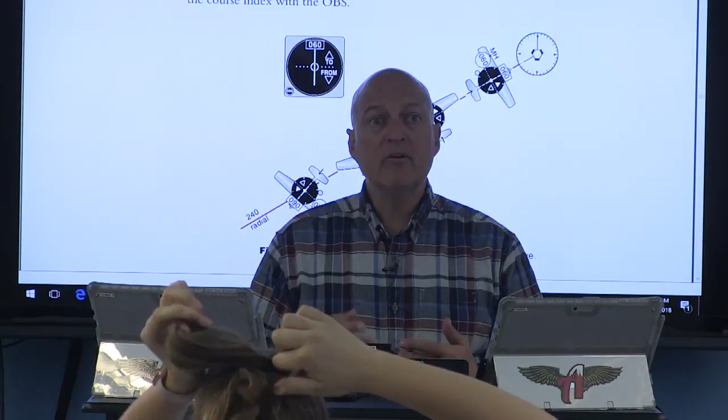But then those days that I'm not here, this is what you get. Kind of a thing. So also, right now, if you were to look at this video, it would be a very poor quality video.

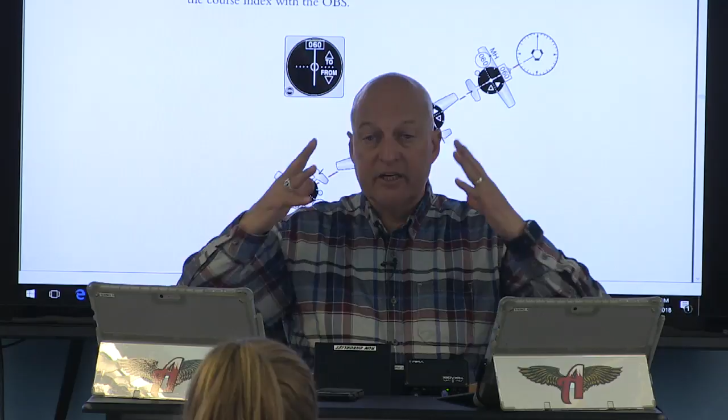Because the screen image back here is so bright, the camera throttles it back and it makes me very, very dark. It looks like I'm in some kind of a shadow. In order to keep the brightness and color levels stable with the camera, I'm going to have lights like I have at my studio in New Orleans to shine on me so that I'm bright, and yet try to have them positioned so they're not distracting for you guys.

So those are coming. The new board that we have, thanks to the grant from American Airlines, is how I'll be able to do the switching stuff with what I do. All of that is going to change, and it will mean something a little bit different for just the videos that I do, but it won't have an impact on what I do here for you.

My point is this: my goal is to create still kind of this hybrid thing for you guys, so that you have the distance learning element on one hand, and then you have me live, for better or for worse, on those days when I'm here.

In the next 10 days, I'll find out more the direction of how this is going to go for our program. And as such, it will dictate how much I'm actually physically here for the balance of this semester. That's just kind of the way it's gonna work.

I don't know if it's going to be 50-50. I don't know if it's going to be 40-60. I don't know. But I know that in order for me to have the number of these course videos in the can, as it were—and I hate that canned thing, but that's just how it's going to have to be—by July 1, to give you an example, in this class there are 43 course videos, there are 32 sim videos, and there are not as many how-to videos because you've already had that here for this.

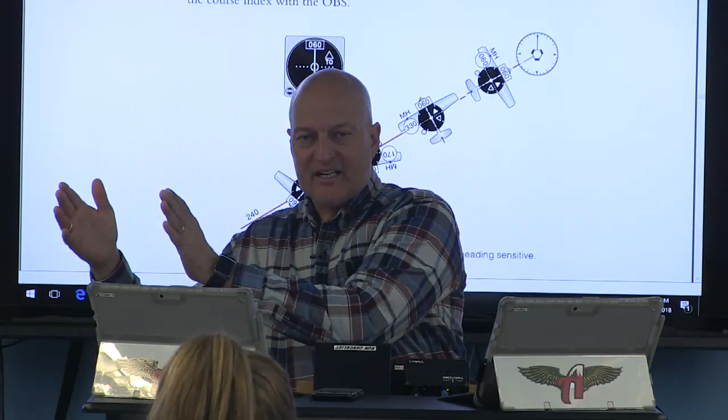That's like a lot. So what I'm doing is, when I start doing that production for the commercial side of things, I'll build the back half of the class first to start those, and then I'll backfill in with the front stuff leading up to it, so that in those times that I'm not here, I'm not slowing you down. Perfect, sounds good—that's what I'm doing, that's my goal.

Side note, did your dad tell you I adjusted the covering on your airplane? He did, yes.

On the Diamonds, we have these straps that connect to the covers at the front, and you snap them in, and then there's a strap with a rubber-coated hook that goes inboard of the flaps on the trailing edge of the wing, right next to the fuselage. It goes over the top of the wing, connects here, and then you snug it up with that. Just based on the way your airplane's nose works, the only thing you could do is tighten it to the point you're basically counting on the antennas to hold the cover on. That would make me really nervous to do that.

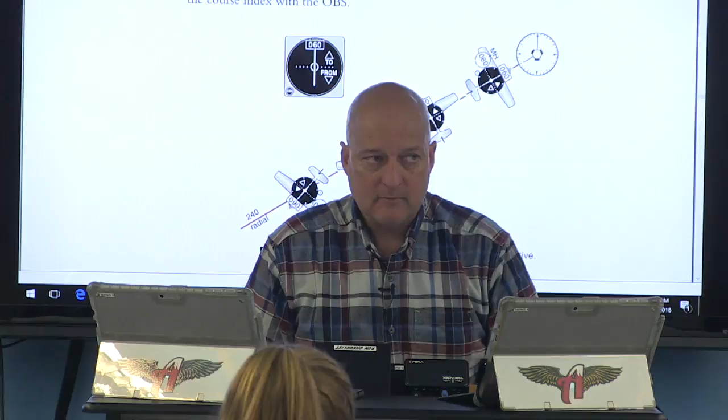I think that kind of tie-down thing, because Bruce's custom covers, the ones that did ours too, they have that solution, and they should be able to do that for your airplane. Sounds good. The other thing I did is on that front strap, it had slipped underneath your nose gear door. It's always fun. So I moved it behind the gear door and above the gear, catching it on the actual nose gear strut to keep it from going any further forward. But that's probably not the best solution either. Anyway, enough of that.

VORs. All right, picking this up here, Ellie, in this review of VORs—this is the part now where your part of this is going to be accelerated more so than the other class. So this is where you get your own deal.

Remember, the VOR is the transmitter. You've got this box in your airplane—this VOR receiver—that puts a display somewhere over here showing you what's happening with your VOR. Remember that your VOR display is not heading sensitive.

If you could put that airplane on a pin and just spin it when you're on a radial like that, your display image will never change. It won't change.

So it's a combination of understanding how you're using that VOR. Are you using it for to-and-from navigation to stay on a Victor airway? Are you using the VOR to know when you're crossing a particular radial for location assistance? You can do that.

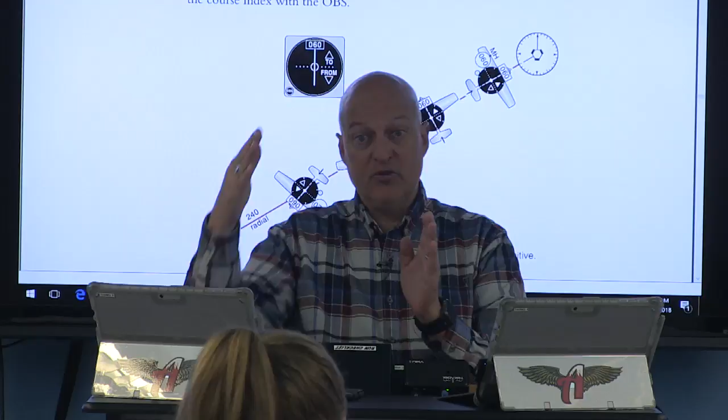Remember that reverse sensing would be if you are going away from a VOR with a TO indication, your CDI could get offset to your right. In normal situations, you know your CDI, your course deviation indicator, is your course. If it's showing your course is over to your right, you steer to the right to go pick up your course.

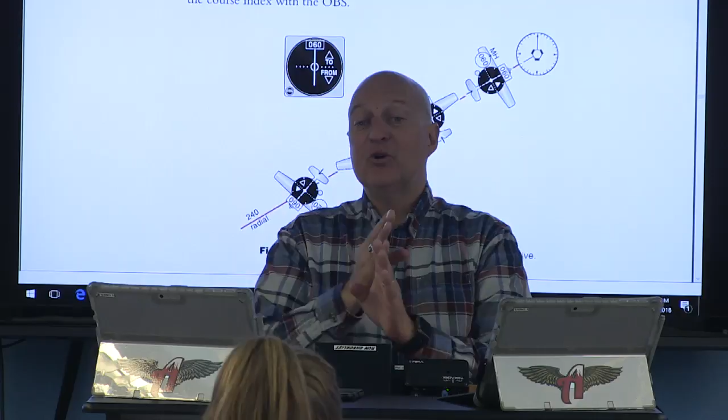Well, if you're going away from a VOR with a TO indication, you may wind up with reverse sensing. You could have a deflection off to the right and think, okay, I'm going to go get my course—but with reverse sensing, you're just going to keep going further away from your course. So you have to remember which way is which and when you're getting reverse sensing.

In the G1000 units, you won't get reverse sensing—they're set up so that you won't. But in the old-timey systems, you still could. That's the point there.

Preparing the OBI for use, we always want to make sure, even if we're launching on a GPS flight plan, that we know how to use our VORs and that our VORs are working correctly. There are things we can do on the ground to make sure they're working correctly—that's in those five bullet points.

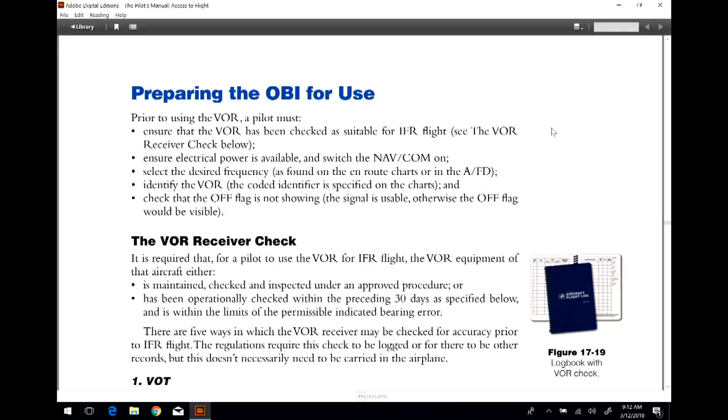We also know that if we're using a VOR for IFR flight, every 30 days we are responsible for checking that VOR to make sure it's working correctly.

There are several different tests you can do every 30 days, but you've got to have that appearing in the flight log when you're planning on using that airplane and the VOR system for IFR flight. You should always, as long as the VORs are working and we have a VOR system in our nation's airways, plan on using the VOR, because you may think of GPS as foolproof these days, but you may be flying in an area where your GPS signal doesn't work.

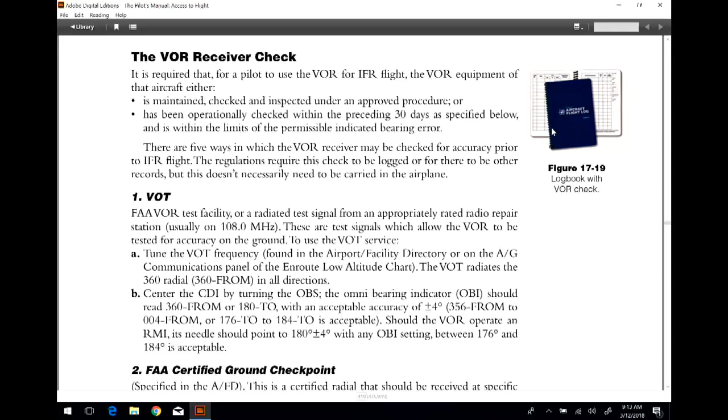If you're flying in some places in New Mexico where they do a lot of military activity, they will shut that GPS signal off so it can't be used, and you have to know that. You'll know it in the NOTAMs, and know you're going to have to rely on VORs. So in order for that to happen, you have to have these checks.

The VOT check on this facility, you've got to be able to do this. These bench tests, you have to have a plus or minus 4 degrees to make sure that everything works correctly. You can look at those and see what all that is.

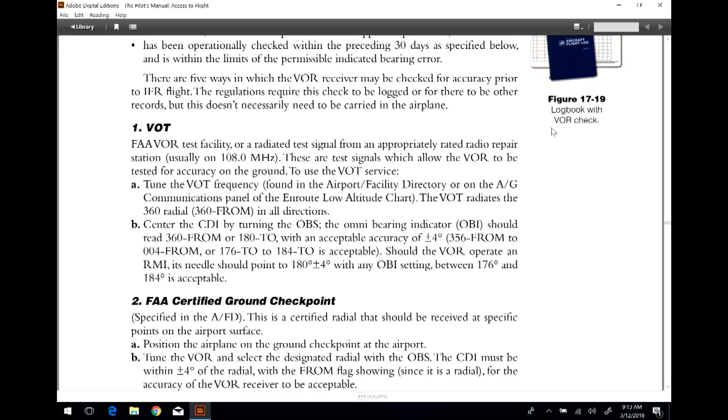A ground checkpoint: again, something on the airport where you taxi your airplane onto a particular compass rose, line up with that, tune to a particular VOR, and it'll give you either a 360 or a 180. You tune that in, make sure everything is lined up, and you're good to go. With that, you have a plus or minus 4 degrees.

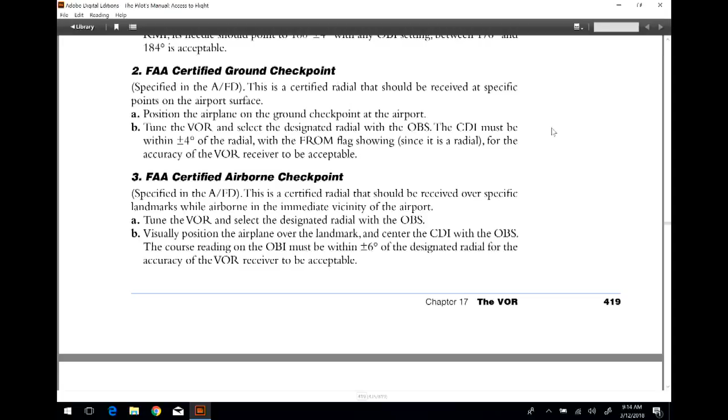If you're going to use a certified airborne checkpoint—for instance, if you fly west of a city and over a lake, that may be a certified airborne checkpoint to a particular radial on a particular VOR—they give you another 2 degrees of slush factor, so that has to be plus or minus 6 degrees from an airborne standpoint, from a checkpoint. So you have to know that.

The dual VOR check is probably the most common, and it's the one I do on my airplane. I'll tune into a VOR, tune both VORs onto the same course or radial, and check them against each other.

What I'll do, for instance, is get out in the practice area, or if I'm coming in from Rifle or wherever, I'll make a turn to the north so I'm on a northerly heading, and dial in the Red Table VOR on both VORs. So as I'm looking at this from my perspective, here I am going north, and I see both my needles pointing off to the east, with my number 1 VOR bracketed by the number 2 VOR, and normally it's just dead on.

There's 4 degrees plus or minus on this—they're both reading the same from that distance. So that's the one I use most often.

There's another thing here—it's not a required check, but something we used to do in the old-timey VORs: we would actually swing that CDI just to make sure we're getting a full-scale deflection on these things, to find out that we'll get it dot to dot, if you will, all the way out. That's something you can also do.

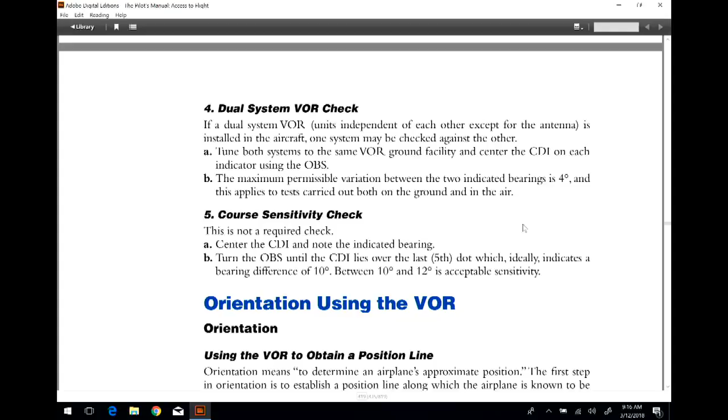It's a little weird because, so many times, especially when you're tuning that in, to do that while maintaining that heading and not wanting to chase that needle—because as a pilot, you just want to keep everything centered. Well, you know, that's how it goes, anyway, so there's that.

Orienting using a VOR: a lot of times people say, wait a minute, how do we use this if we're on a GPS flight plan? The example I use is on the radio you hear: 'November 504 Hotel Lima, say position.'

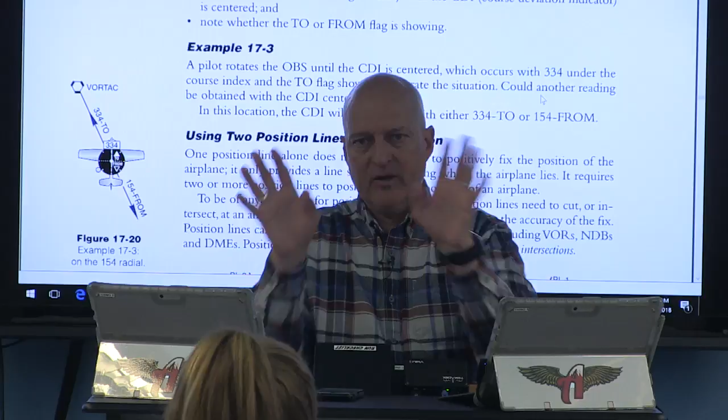So what do you do in that situation—do you give them a lat-long of your GPS? No, because they don't have any way on their screens to know what that is. Do you tell them how far you are from your destination? You can't do that either. Let's say I'm going to New Orleans, and I get over the hump near...

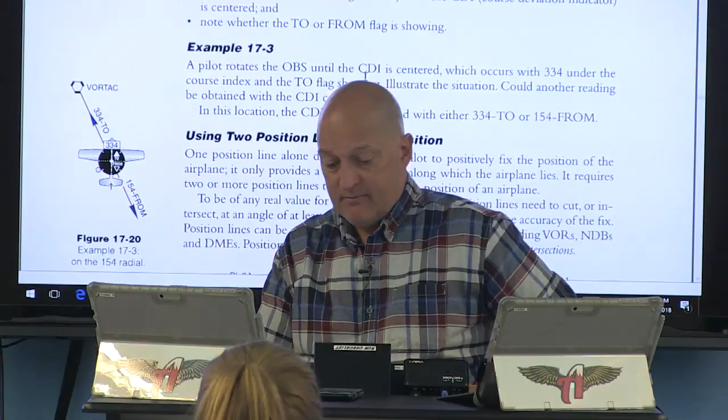Did we just lose power here? I don't know, I'm still showing live. Well, there we go, I don't know what happened.

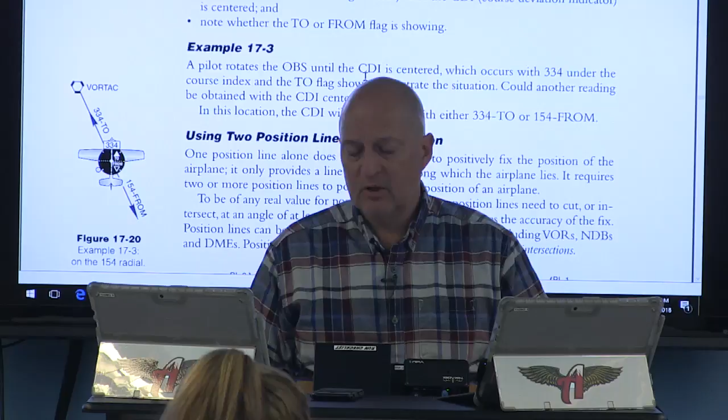Nutty. You know, if I get over to Colorado Springs, they give me direct New Orleans. They said, November 504 Hotel Lima, we can give you direct MSY. I'll take it. Boom. Five minutes later, somebody comes up and says, November 504 Hotel Lima, say position. You know, what do I tell them?

I'm 820 miles northwest of New Orleans - not helpful. So this is another thing where we can use VORs. We can tune in to the nearest VOR, which we should be tuning in underlying a GPS signal anyway. We should be staying up with those VORs, to have at least one VOR within range anytime we're flying on a flight path, even if we're GPS direct and off Victor Airways.

In this case, you can tune in to whatever VORTAC happens to be in figure 17.20, turn your OBS or course needle until it centers, and you can read the tail or see what this is to know what radial you're actually on. In this example, you're on the 154 degree radial at whatever the DME is. You can say you're northbound crossing the ABC VOR 154 degree radial at 13 DME. Now they know exactly where you are.

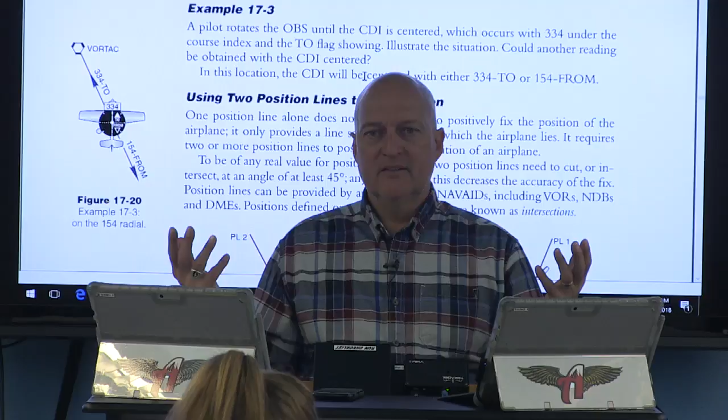So that's what it is. Now with ADS-B, once that fully comes into play, they are always going to know where you are. Because your aircraft, for instance my airplane here, and yours as well I'm sure, has ADS-B already plugged into it, they know the type aircraft, make, model, they know who's flying it, they know everything about that airplane because it pops up. So they don't have to ask where you are, but in case they do, there you go.

Triangulation, using two radials of two different VORs to identify a fix, to know where you are. That's what they're showing here in figure 17.21.

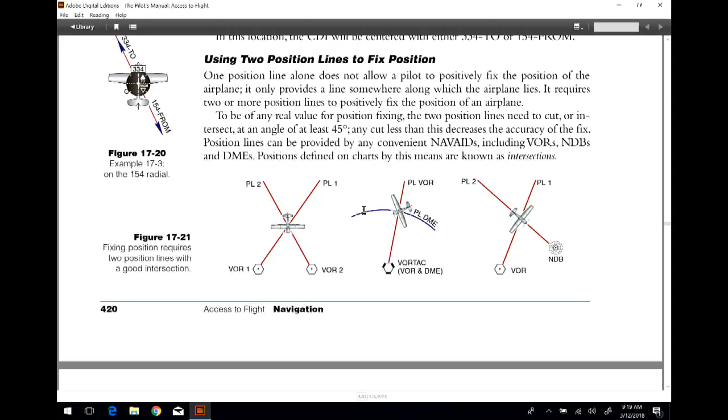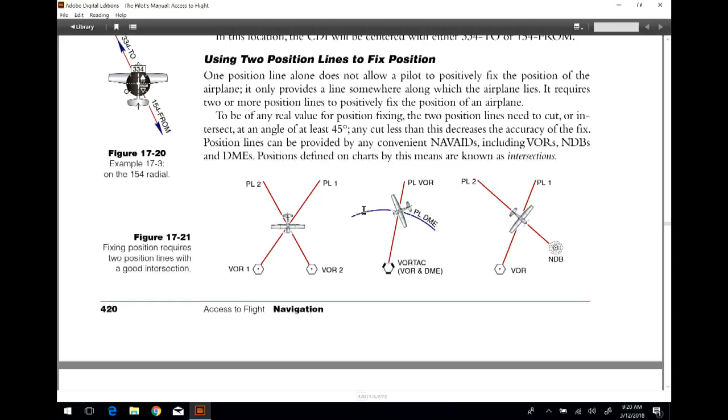And the DME arc - the big thing with the DME arc, and we're actually going to go through DME arcs when we get more into the approaches. Some autopilots can actually fly those arcs. Some autopilots can only offer guidance on these things, and so with that we go to the twist ten, turn ten mode of flying a DME arc, and we'll talk about that when we get back to it.

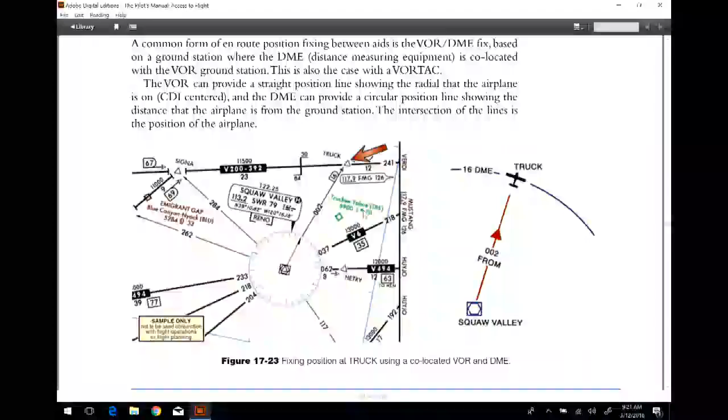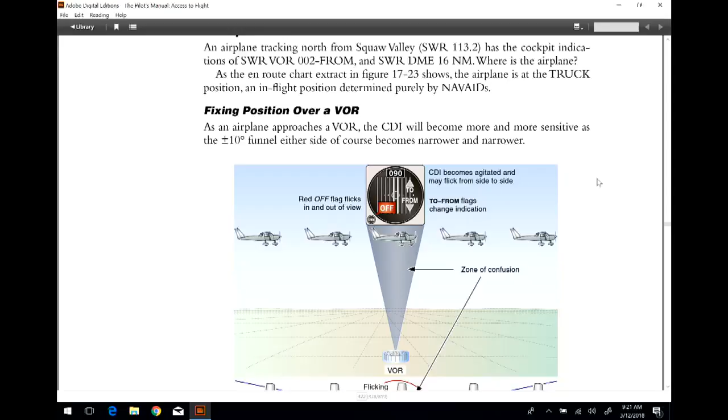Trying to turn these - one of the things I've noticed is that when they have these images, like I don't know if it's a JPEG file or whatever it's going to be, it really slows things down when I'm trying to move this thing.

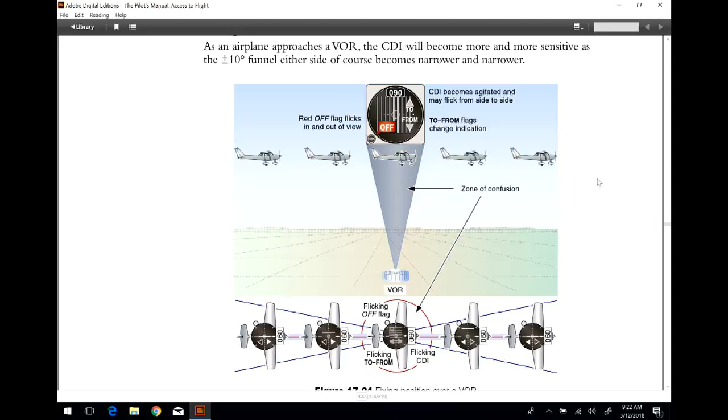It's important to have established a wind correction heading to hold whatever course you want prior to getting to that cone of confusion. Once you get into that cone of confusion is when that needle, that CDI, is going to want to wobble around.

Don't chase that needle, because you'll just be chasing it over the VOR. What you're looking for is the flag flip, to know that you have crossed that VOR.

If you're continuing on a particular airway that holds you on that same heading, everything switches now to a from indication, and you've already tuned it to the back of the VOR. Now you're flying it from the front, so you wouldn't have to change anything to get the appropriate course guidance as you go away from that station.

If you need to make a course change to pick up a different Victor airway from that, let's say you're flying from the west, so you're flying here and you have a to indication on 090.

You're flying the 270 degree radial. You're coming to the VOR, you get the flip, and then from that point you're supposed to turn right.

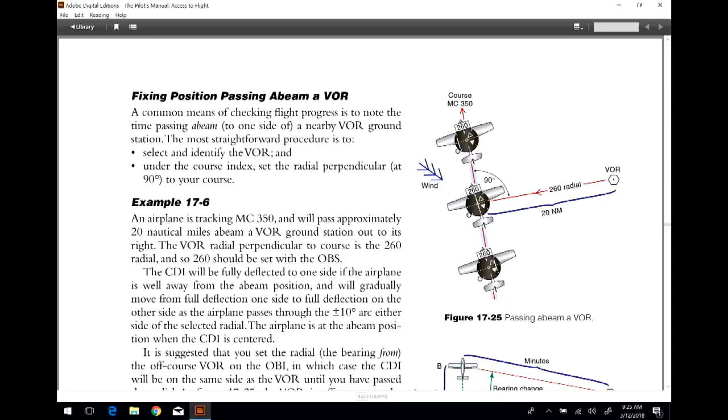So what they're doing is using this indication from the front side of that compass rose, picking up that 260 degree radial. And you'll notice it's got the from indication. So here you have your traditional flags, and in this case you're doing it with the from indication.

It's showing a deflection to the right. It's showing that your course needle is over here to the right. Right or left, you kind of have to remember which it's going to be. If you have a from indication with it, your CDI is going to deflect to the side of the VOR.

If you have a to indication, it's going to deflect on the opposite side of your VOR. It's kind of weird, as you're going to intercept that. As you get closer to it, here with this from indication...

...that CDI needle will get closer and closer and closer, and it'll center. It'll move fast or slow depending on how far away you are from the VOR. If you're close to the VOR, it'll move fast. If you're far away from the VOR, it'll move slow.

And then once it centers, at that instant, you are crossing that 260-degree radial. Even though you're headed north-northwest, that's it, there you go.

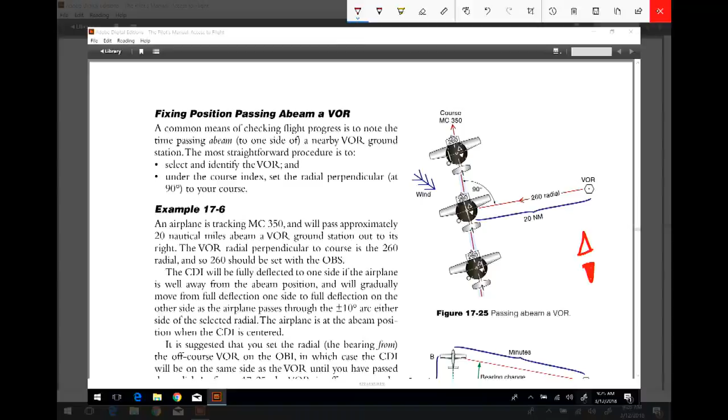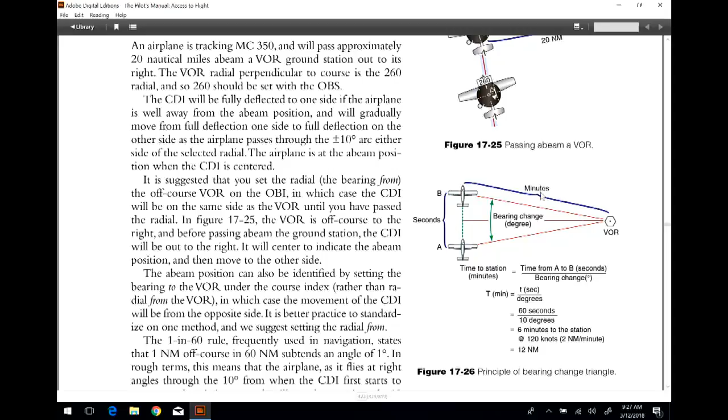You have a bearing change triangle. We don't normally teach this, and one of the reasons is because most of the equipment we use right now, we kind of cheat and sort of don't need it. There will be things like this that we will do, however, in the navigation portion. Once we get to the commercial side, we'll start doing more of this algebra here.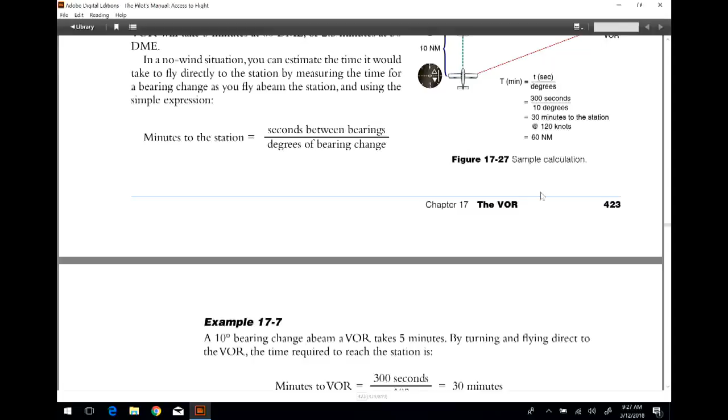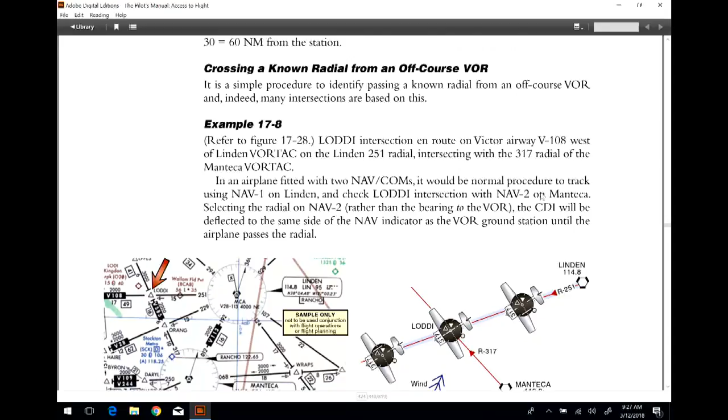Crossing a known radial from an off-course VOR. This again talks about the same thing.

Just remember that in that from indication, that needle, your CDI, is going to point toward that station. Whereas if you were doing this with a to indication, your CDI would be deflected over on that side. But just know that when it centers, you have crossed whatever radial you've dialed in, regardless of your heading.

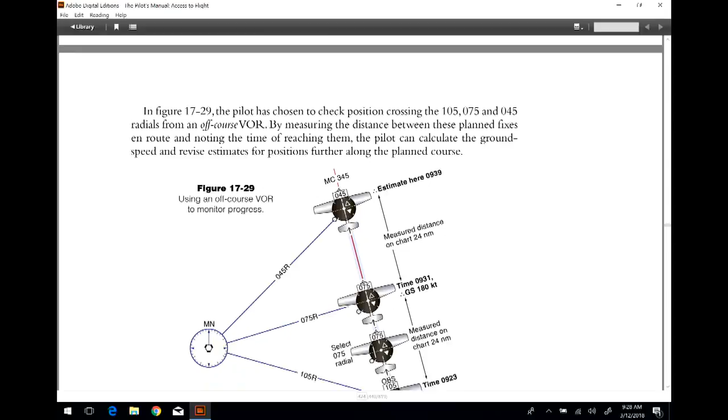If you know your distance from the station, you can triangulate the distance in degrees, and you can do this mathematically. You can also do it on a map to note the distance between certain points using an off-course VOR triangulation piece.

So you can do it a couple different ways - mathematically, or by the chart. The purpose of this is to know exactly where you are. The chart method actually shows you exactly where you are, and that's really what you want to know. It's kind of what I prefer.

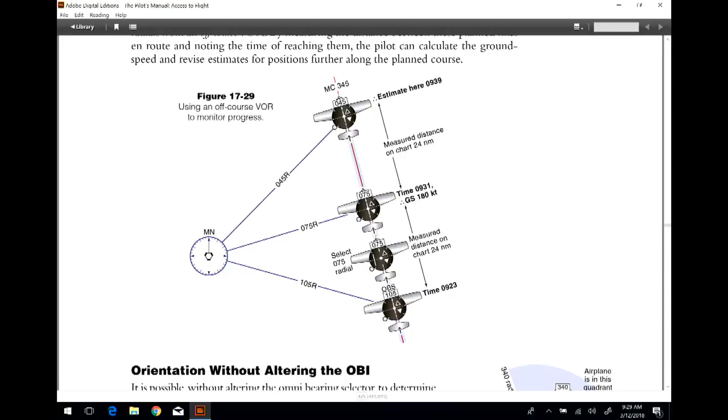Now this is getting into orientation without altering your omni-bearing selector or the indication that it's giving you. The FAA, this is one of the test things that they do to kind of test whether you know where you are.

They'll say here's a VORTAC, and they'll say, okay, your airplane has the following indication, and they'll have a little scattergram of airplanes out there, and they'll say which airplane would have this indication. These are some of the test questions you had from last year. These are going to be kind of the same.

As you look at this, the best way to do it is to look at the illustrations you have in your test prep stuff, but also to project: okay, if I'm over here and I'm looking at this, how would this look? Then verify that with what you see in the question. If it's different, try to figure out where you might have messed up. And if not, ask me and we'll get it squared away.

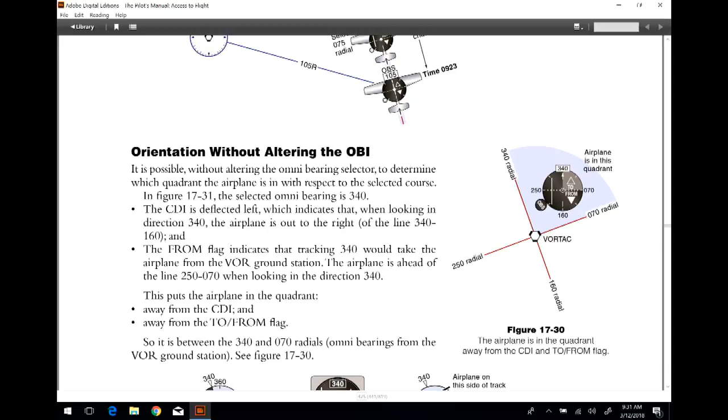So in this case, if you look at this, your indication is that you want the 340 degree radial with the FROM indication. Normally that means you're flying away from that station. That's kind of where it is.

So this is a normal sensing situation. What is this illustration telling you? It's telling you here that your CDI is deflected off to the left. The CDI is your course, so in order to get on course, you need to turn left. The only place where you'd have that left deflection with a FROM indication is going to be in that quadrant.

Remember, here's something else that happens - let's say you were perfectly on course. Remember what happens when you cross anything that is perpendicular to your actual OBS radial that you have dialed in. If your airplane is over here and it's flying this direction, it's going to get that flip. That TO-FROM flip happens when you cross whatever perpendicular radial it happens to be, to or from that VOR. So that's where you get the little flippy.

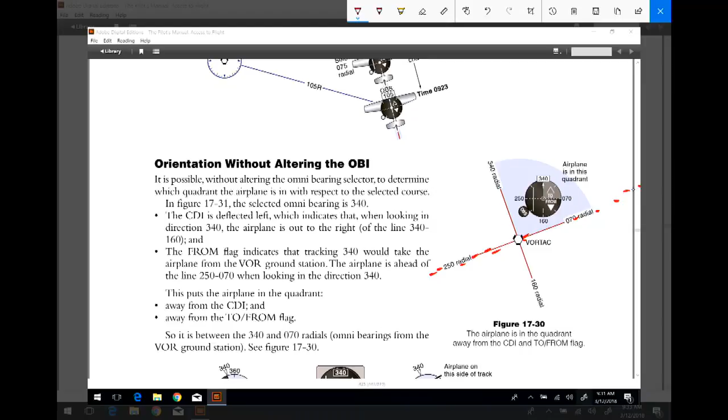Erase that - here I can erase this by just getting rid of that. And this is kind of what it's showing here, is it's showing the why that works here, again using the perpendicular radials from there.

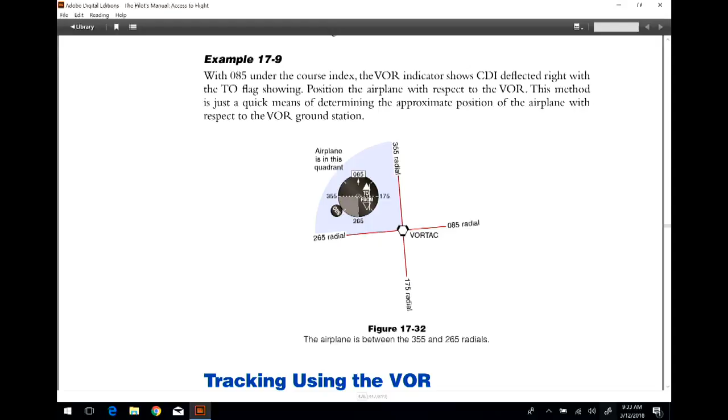So here's another way to think about this. Don't think about the illustration as a whole. Think about, this is what I'm seeing in the cockpit. I'm flying, let's say, roughly eastbound - that's the direction I'm flying. I have 085 set up as my OBS with a TO indication.

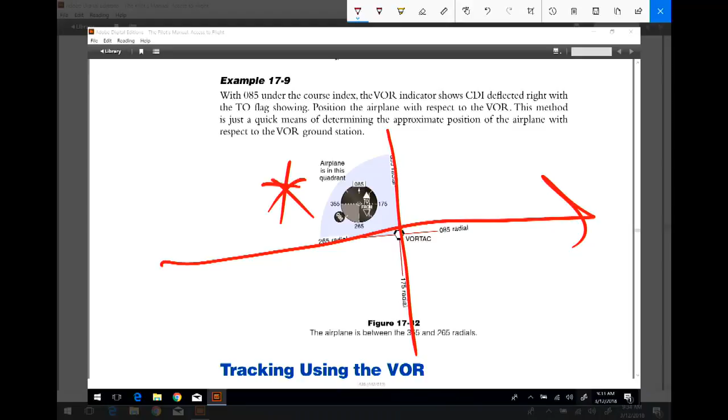With a TO indication, but I'm showing a right deflection of my CDI. That means I'm left of course. If this is my course here, I know I'm left of course. And the fact that I still have a TO indication tells me I have not crossed that perpendicular line from that 085. This would be the only logical place that indication could be found.

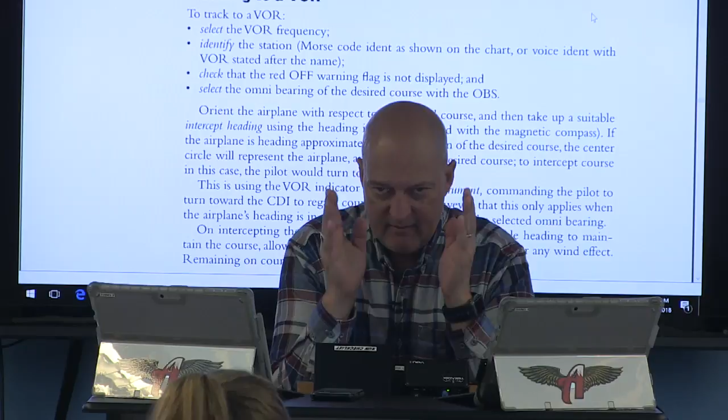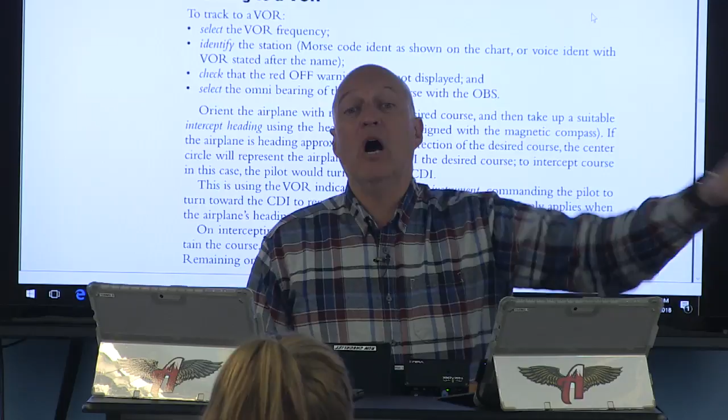Tracking using the VOR. This is the first time we're talking about how to actually use a VOR to get to it. Can you imagine all this other information we've covered if I hadn't explained up front how this was going to work? How ridiculously lost you'd be if all this other stuff hadn't happened.

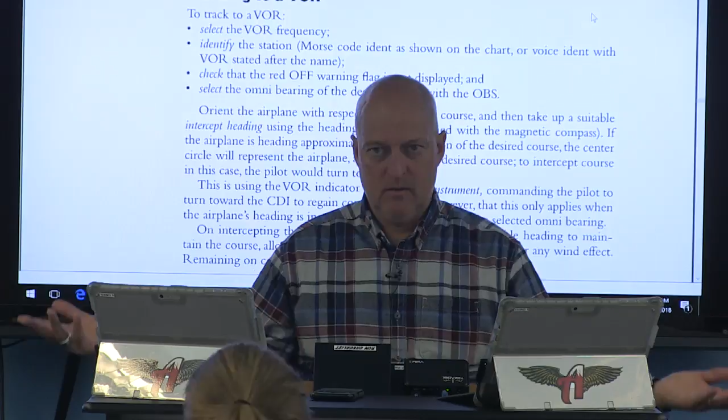It would have been madness. Cats and dogs living together, total chaos. I don't know why they don't think of things more logically than they do. There's so much cart-before-the-horse stuff, and it's maddening. Okay.

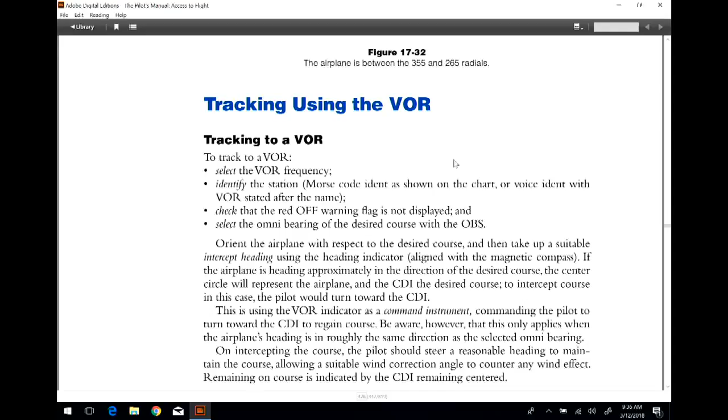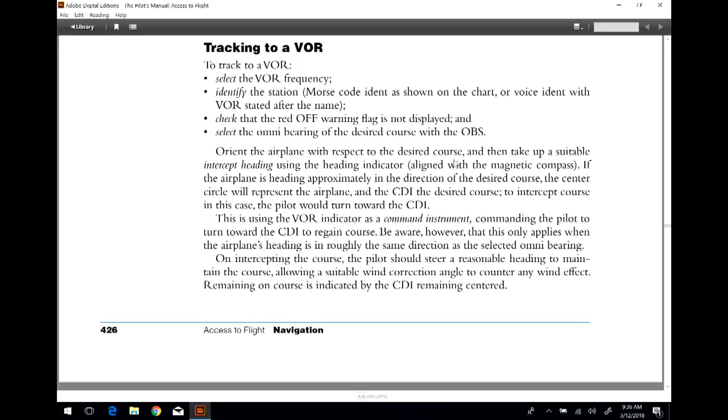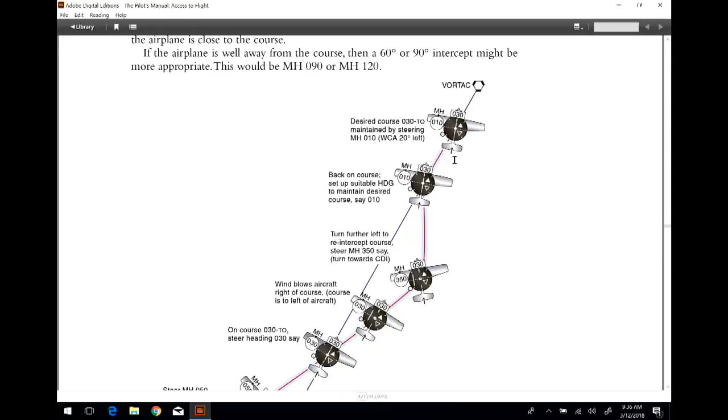So here's how to use a VOR. That's kind of how you do it: select your station, make sure it's the right station, tune into the channel or radial you want, and there you go. In this case, they're using this illustration to track to a particular VORTAC. They're on the 210 degree radial, tracking to the back using 030. That's kind of what it looks like.

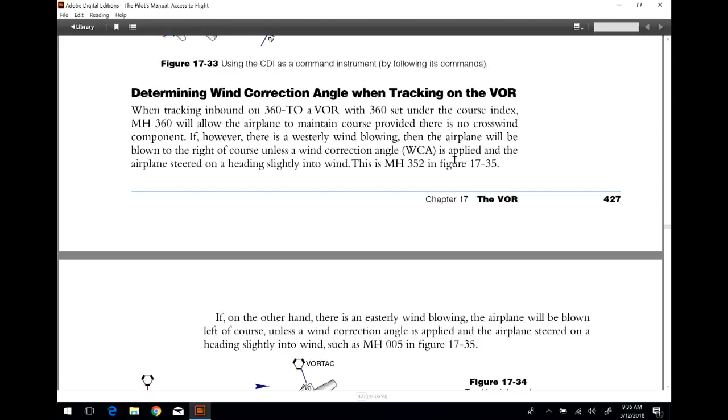Determining the wind correction angle when tracking a VOR. A lot of times you'll have a pretty good sense of what the wind will be, but there are several ways to do it. First, turn 10 degrees - is that holding it, or is it too much? If it's too much, go 5 degrees. If it's not holding, turn 20 degrees. If 20 is a little much, go to 10, then 15, then tune it into 12. That's kind of how you do it.

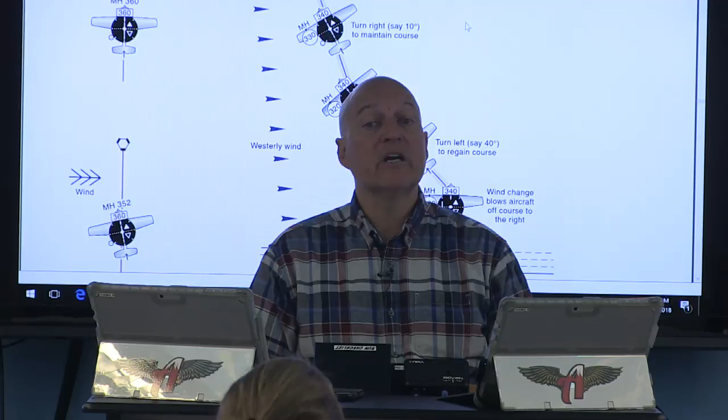You can also get an idea before you launch by knowing your winds aloft forecast. If you're tracking north and have a westerly wind of 30 knots, you already know you'll need some course correction - it depends on your true airspeed. You might know you'll need 15 degrees left to hold your course. That's where you start, then tune it in and watch where it goes. By the time you get it set up perfectly for a 30 knot wind, a little further north it's only 20 knots, so you make an adjustment. That's what you do.

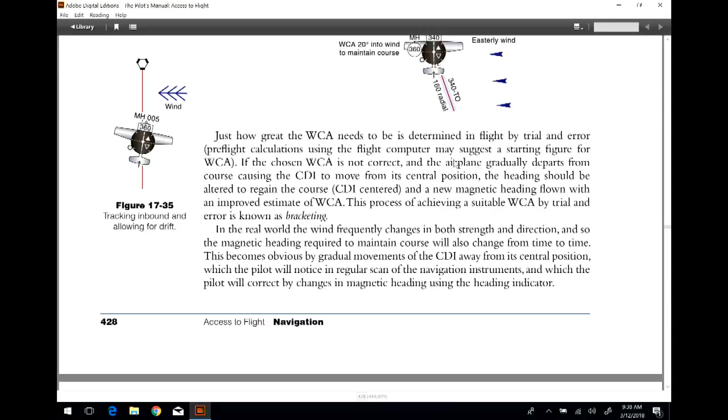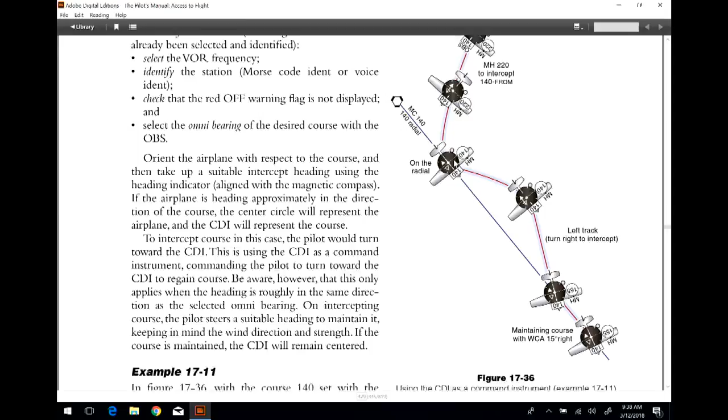Tracking from a VOR, from the front. Same thing, so that you get normal sensing.

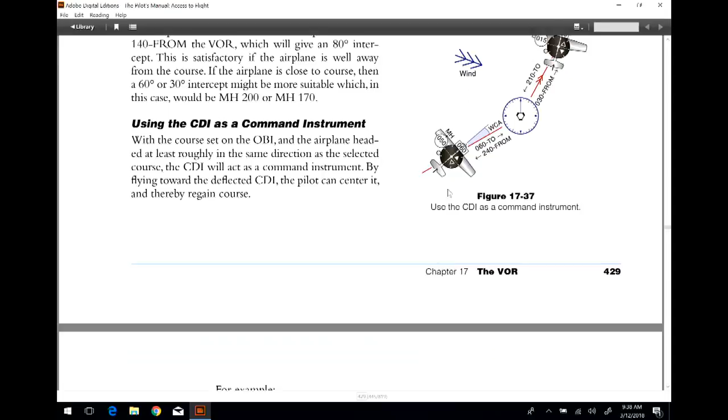For ease of operation, use the CDI as a command instrument. I've always found this concept a little odd, but you can do it. They're talking about using it so you don't get reverse sensing. The non-command piece is where, for some reason I still don't know, you'd want reverse sensing. When you go away from a station using it from the front - in this illustration, the 140 degree radial outbound with a FROM indication - you get normal sensing. The command piece shown here is: if you're left of course, your course is to the right, go get it. That's what you want, unless you're doing some kind of parallel offset. More on that later, because there are approaches where a parallel offset might be preferred. However, you can set that up on your GPS as well, on your G1000, to do parallel offsets. So that can happen GPS-wise too. Bonus.

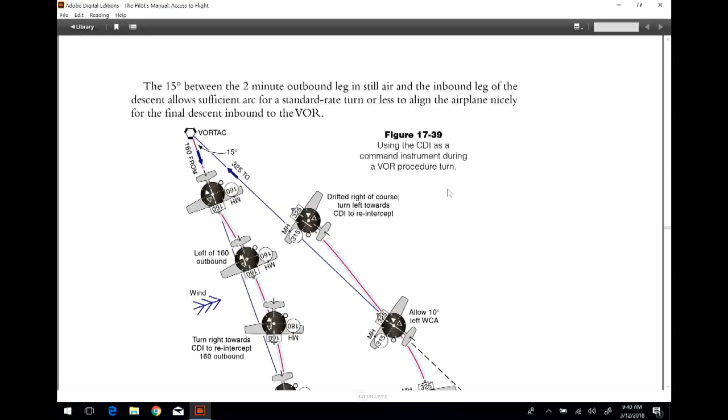How are we doing time-wise? It's 9:40, so we have 10 minutes, and then I'll show you a slideshow. It's going to be great. Woohoo! So excited. Okay.

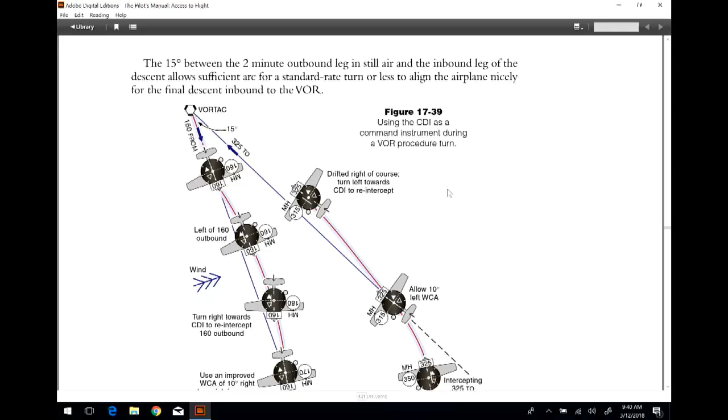On this illustration here, what they're showing, if you'll remember from the instrument stuff, in order to begin an instrument approach, in some cases, depending upon how you're approaching that VOR, you're required to do a procedure turn. In this case, it's a little different, kind of a teardrop turn, which doesn't tell the whole story.

In this case, you're tracking it outbound correctly from the front, 160 from the front. When you get to the appropriate mileage from that station to begin your turn back toward it, you're doing it basically by heading, since you know you're going to reverse course, almost come back to where you were. That's where you use your heading indicator while making your adjustment on your OBS, because you want to come back so that you have normal sensing. That's what they're showing you in figure 17.39.

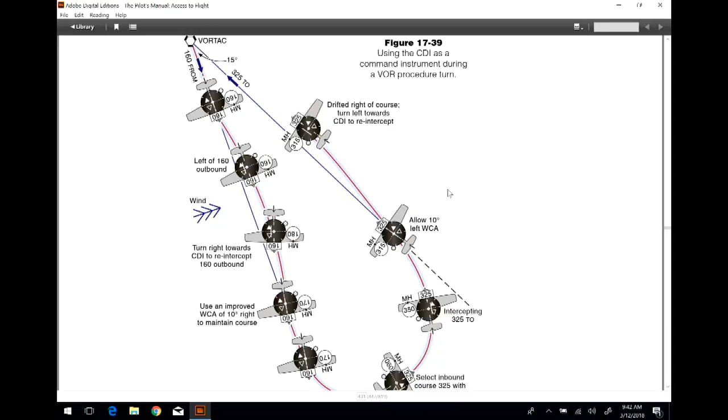This is useful. Knowing where you are, knowing where you want to go, that's kind of the whole point of flying, I think. So how can we do that using VORs? This is sort of what they're talking about, which, by the way, is what I've been talking about. Just saying.

So in this, you're selecting an outbound course. You're coming in from one way or another. It's not really a Victor airway, but they have these off-course recommendations whenever they're trying to get you to cut a corner, or to stay away if you're making a course change away from a station at a particular area, so you don't clog up the airspace over that VOR, so you don't have to go all the way to the VOR and then make your turn.

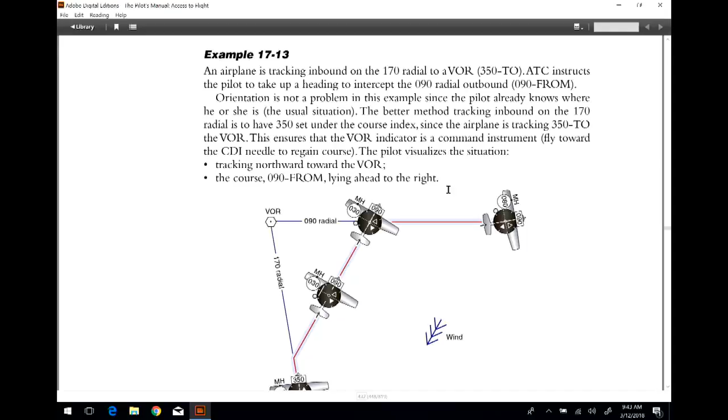In this case, you get to a certain distance, then make a heading change to intercept your course away. So as you're looking at this, doing it normally, you're going to be on the 170 degree radial, tracking to the station. So to the back, 170, the reciprocal 350, tracking here. Then you make your turn, basically a 45 degree turn, whatever your heading requires, to pick up the 090 degree radial to go east.

So in that case, you set your heading with a from indication from 090, from the front of what that's going to be. Your deflection is going to be toward the VOR side, which you expect. Once that needle starts to center, when you get within half a dot of centered, depending upon your distance from the VOR, that's when you begin your turn to intercept that VOR. As you begin to intercept, bingo, you're just right there, of course depending upon wind correction angle.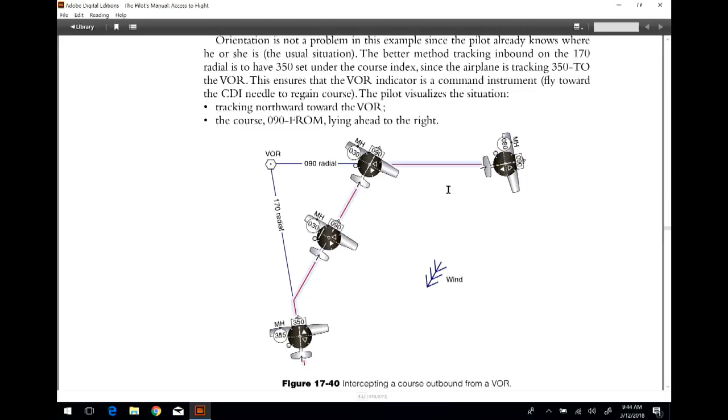If you're having to make less than a 90 degree turn with this wind consideration, you may not need to start it as soon. Or if your wind is from the opposite direction, you may have to start it sooner. We do this all the time, intercepting an inbound course.

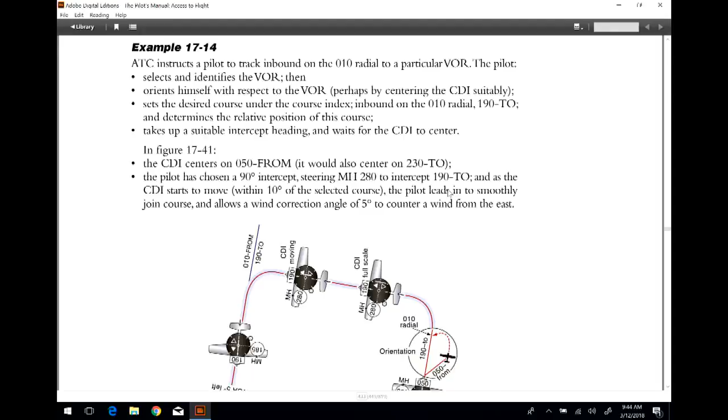With this, we see this a lot on paper, but most of the stuff we get are going to be vectors. ATC is going to give us vectors with this. That said, we don't want to get sloppy and not understand what they're attempting to do for us, to be able to get us set up for the inbound course.

In some of the procedures, it may actually be spelled out: this is what you're going to do and this is what to expect. But in other cases, they're going to give you what they need from you, basically, that's what they're going to ask you to do. Depending upon traffic, depending upon weather, depending upon, you know, phase of the moon, I don't know, that's kind of what they're going to give you. The purpose of what they're showing you here is to say, here's how this might look, using this 050 degree radial with this from indication, getting ready to make your turn.

In this case, they have a TO indication that they're already getting set up, so you know that with that TO indication, the course deviation indicator is going to be set up opposite of your course line to bring you back. When that centers and begins a half a dot in, it starts bringing you back around to set you up with what you're going to want, which is the reciprocal to the station, for you to track the 010 degree radial inbound.

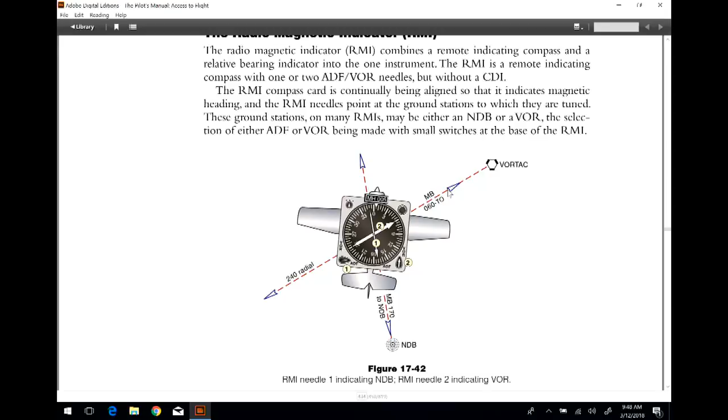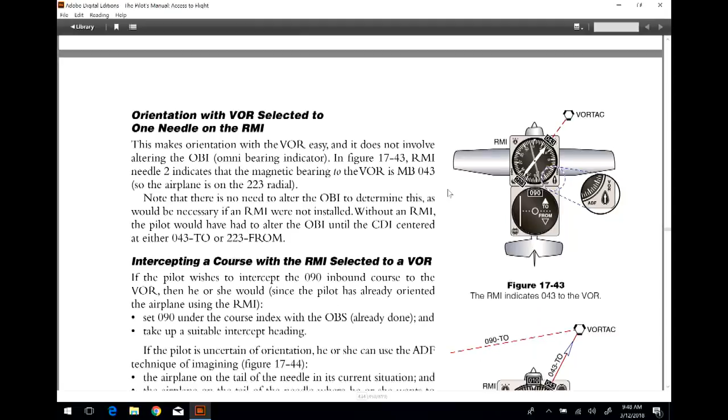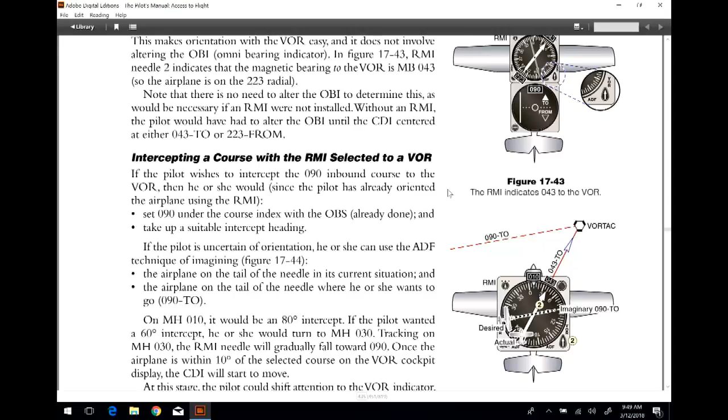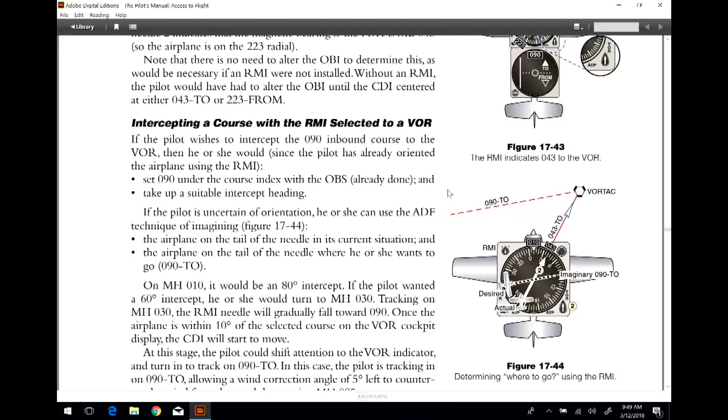I'm trying to remember if we have any questions at all that involve an RMI. Not that I know—there's a section for it in Prepware, but I don't think it has any questions. I think it just talks about what it is. I don't believe there are any FAA questions with regard to an RMI. Yeah, it's in the IFR section, but there aren't any questions about it. It's just there.

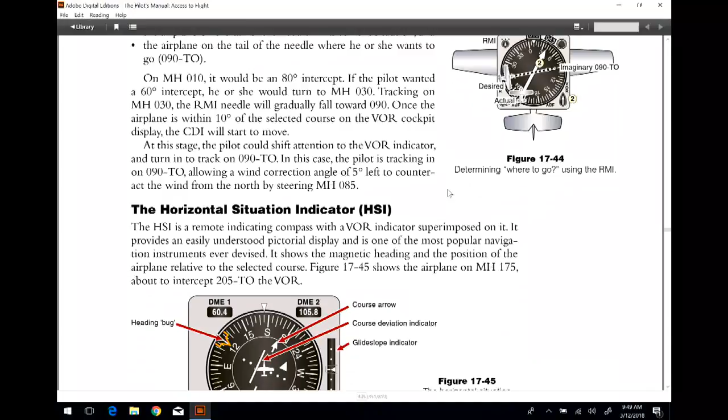Moving on, HSI. Remember that an HSI is a heading indicator that has some form of navigational overlay within that instrument. It can be GPS, it can be VOR—that's what an HSI is, a heading indicator with some form of navigation overlay.

So when we look at figure 17-45, they're talking about this as always a command instrument. You can kind of see it's basically the way our G1000 works. So this is more applicable to our situation, no pun.

Wait, see what I did? I have a gift.

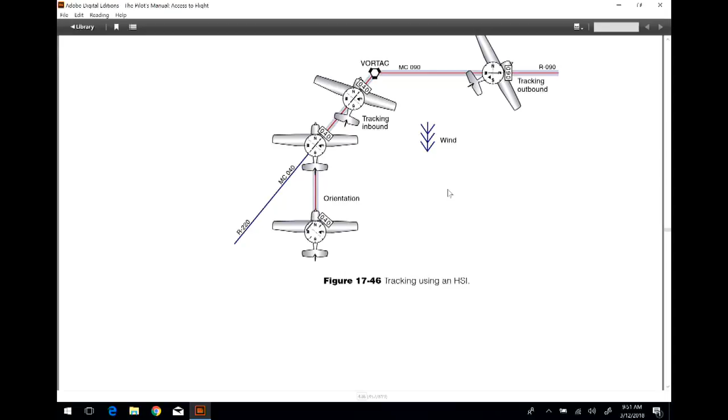So with this, whether it be VOR or GPS, it'll also give you vertical navigation information over on the right side—it'll show your glide slope. And your horizontal is going to be your CDI. That's kind of what we do with this. This is an instrument you're familiar with, tracking using an HSI. It's pretty straightforward. There's chapter 17—woohoo!

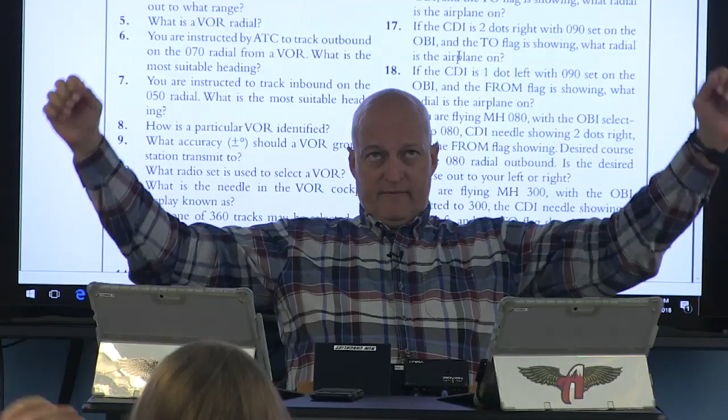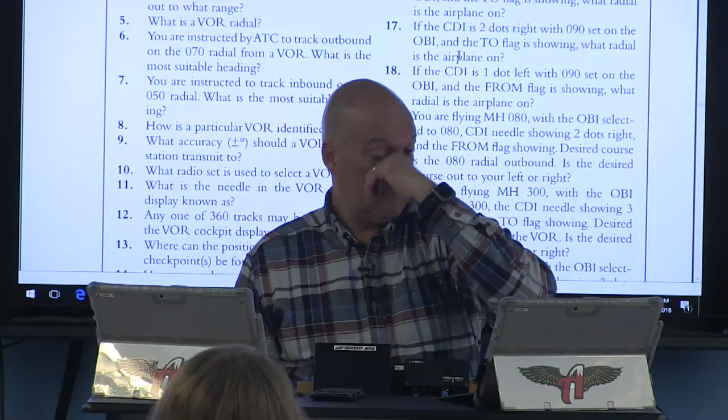Wednesday. I don't have you tomorrow, do I? No, so Wednesday, great, Wednesday. Next week I'll be here Monday and Tuesday, and then I will not be here for the rest of the week. Quitter—no, I'm teasing. You're here Monday, Tuesday, and then you're gone. And then I'm missing the Tuesday we get back because we have Monday off in April, and I'm not going to be here that Tuesday. But I'll be here the rest of the week, and then all through April, I think, maybe depending on how much my parents love me—how much they're willing to devote time to my birthday. Just please let your mom and dad know that when they're ready to adopt the big bald man, I'm ready, I can make that work.